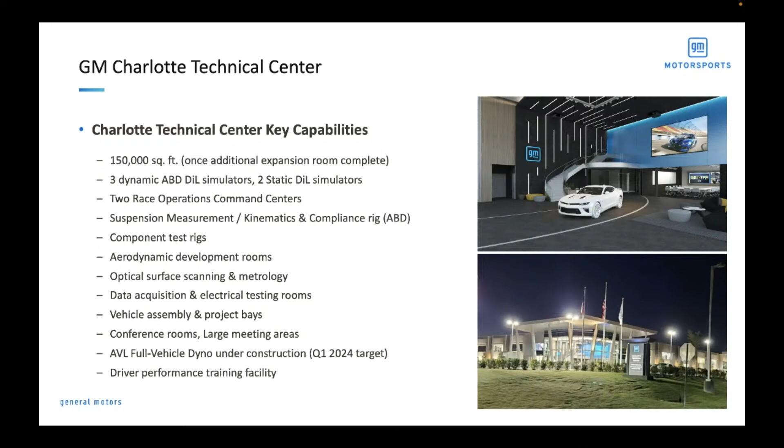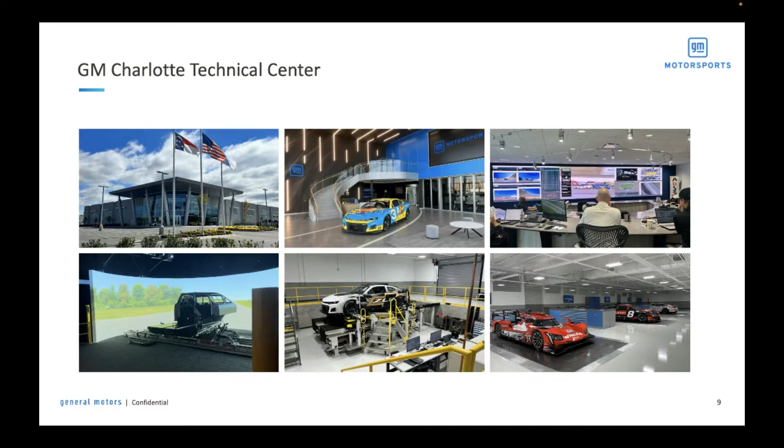So really, when we were sponsoring a third party to run racing, there really was not that connection to GM Production Engineering. So GM Motorsports, the intent is basically to go between the race teams and actually connect the racetrack to GM Production Engineering.

And there's a lot of, as we talk through that, a lot of that is the processes and techniques that it takes to do it quickly in racing. It changes the way you have to think and the way you have to structure all the digital engineering process, because you can't take 2 months to run a simulation in racing. You have to do it weekly, so you have to make different choices and different processes.

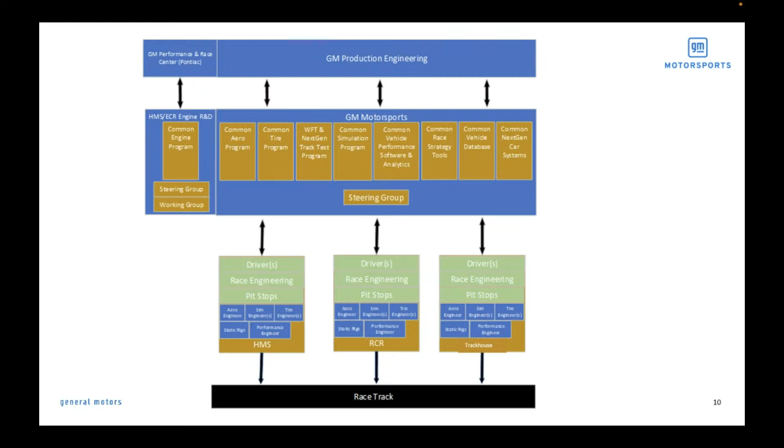So we took all these race teams that used to have their own aerodynamics program, CFD program, simulation. We took all that off of the teams. I myself came from one of the teams and built GM Motorsports to create all these common tools that now all the teams use together. So in NASCAR, when you see all the Chevy teams, we're sharing setups across the teams, the information. There's a lot of collaboration, all of it common tools that we've built.

So if you talk about racing and really what it boils down to, what's successful in winning a race are really these 6 things. And fundamentally, that's all it really is. I've gotten into a lot of arguments over the years to show that this really is all that matters.

And it's the driver, which comes down to the actual talent of the driver, but it's also what information does he have, what does he understand about how cars interact against each other, feedback, training of him, mental training, heat training. Anything related to driver performance is of course a key factor.

Engine is really kind of longitudinal acceleration capability, so it's driving, braking, all those types. The aero, there's only two things that affect the performance of the car. To increase the envelope of performance, it's the engine and the aerodynamics. It actually increases the potential of the car, but then it's actually the tire and the tire force optimization that actually gets that potential out.

So setups, chassis, all those types of things really is how the loads are distributed and how the vehicle dynamics puts load into the tires, which creates the lateral forces, and optimizing that and managing that is really that key fundamental.

Then in race event execution and the pit stop, you can win a race by showing up with a great engine at a track or making a great pit call, but you can't win championships unless you're the best at each one of those. Over the last three years, we've dominated many of the series, and the focus is constantly building up our expertise in these areas.

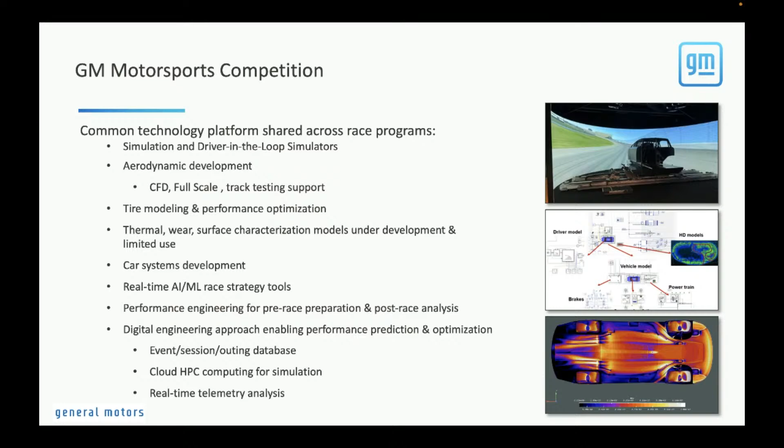Talking about vehicle simulation, our models are all multi-body models based on Modelica, which is an open source multi-body modeling approach. So we have offline simulation that the race engineers run at the racetrack—they can walk right into the driver-in-loop facility, set their laptop down, hit a button, and run on the simulator. The tracks are scanned down to less than 2 millimeter accuracy, so all the bumps, all the cracks, everything is simulated and running on that racetrack digitally.

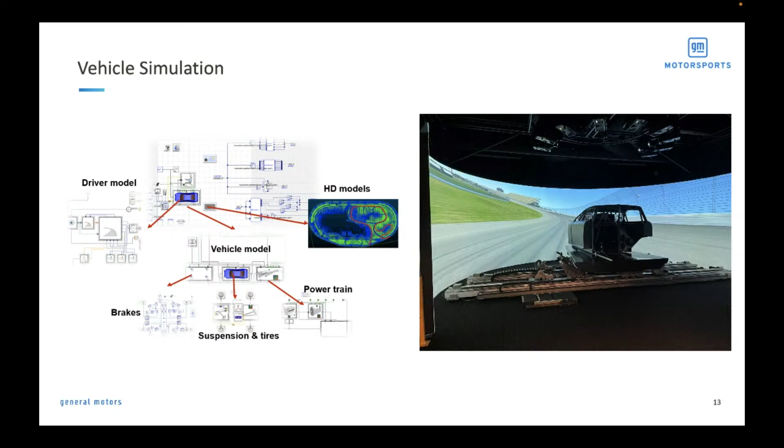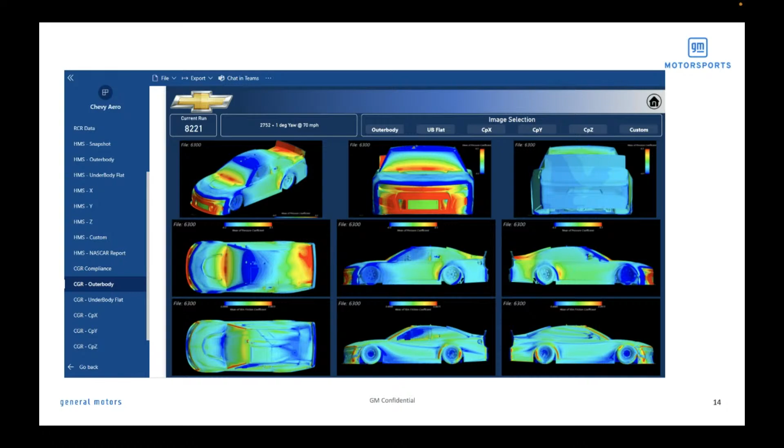Aerodynamics and CFD have been around a long time—I joke that I knew what CFD was before people could spell it. So much of the work is done there, and we create a lot of tools. We run anywhere from 30 to 100 CFD runs a night, about 500 million grid point cases, pretty large cases just for NASCAR. There are thousands of runs done, full 3D, using a lot of different techniques to understand the car from a development standpoint, but also how it behaves in traffic, next to the wall, and a lot of other factors. We're also creating a lot of software so we can look at the images and do comparisons—we're as much a software creation company as we are engineering.

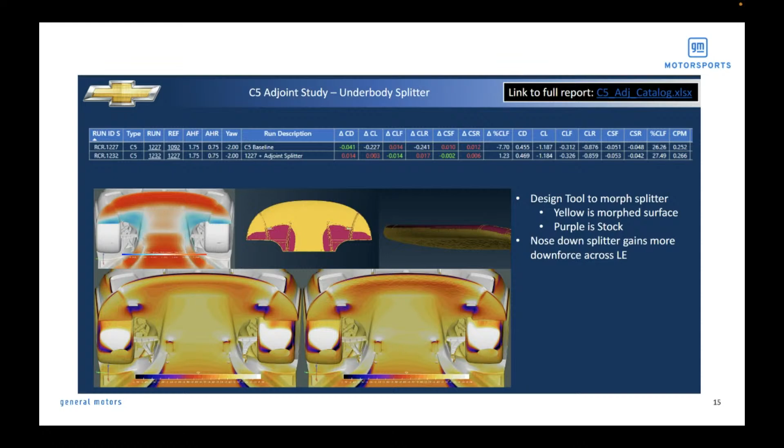Here's one example: as we were developing our 2023 car, we did a lot of adjoint methods. Much of what we do relates to how tech inspections work—they give you a tolerance, so if you get 100,000ths of an inch of tolerance, we're going to play in that and maximize every single piece of it. We do a lot of adjoint methods to look at surface sensitivities globally, and that really drives a lot of our aero development. It's a good example of tying CFD and aero development into the full-scale wind tunnel—the whole front of the car is all rapid prototype parts, with a frame behind that. So as we develop CFD, we can validate straight in the wind tunnel with a full-size car.

The main reason we did this is the actual submission from the sanctioning body required the full-scale car be tested. So we wanted to make sure we understood exactly every single thing, and that process happens very rapidly.

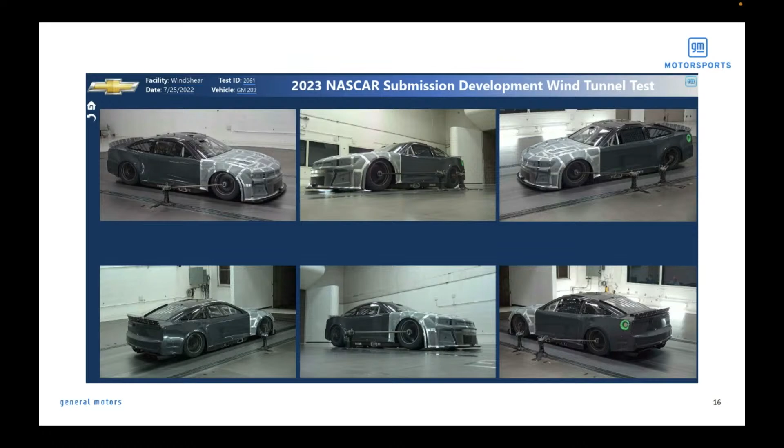The whole front shell of that car can basically be built in less than a day. The GM RP lab has about 1,000 3D printers, so we can turn around things quickly. Getting in front of the production side is another thing, but once we do, they can move really fast.

Some other things on aero that come into play: the aero data has to be put into an aero map or fitting form so the simulation can use it. There are also a lot of plotting packages so the teams can understand where they need to run the race car.

As you get into the other interactions in the system, aerodynamics plays a really key role in the tire modeling, because you're trying to look at the thermal modeling of the tire, the convection to the air, and the brakes. Modeling the brakes fully from the heat transfer, the conjugate heat transfer through the parts, as well as the aero side, is really important to get that heat input to predict the tire temperature correctly. So aerodynamics plays a much bigger role than just external aero or even internal aero on the combustion side — all these systems have an aero component.

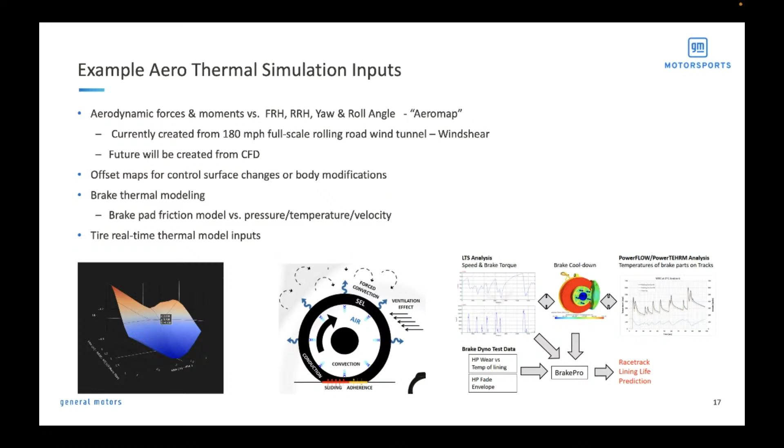This is a complex tire chart for a reason — this is tire modeling 101 in racing and NASCAR. You start out on the left with these tire test rigs. There's one the industry uses up at Virginia Tech called SoVA/GCAPS. The thing about these tire rigs is they run on sandpaper.

If you think about the spectral makeup of sandpaper compared to asphalt, in reality it's not even close. Over the years people would go on these tire rigs, fit that data to what's called a Pacejka magic formula, which is just a curve fit, and they would go run with it.

Over time we realized, from testing on the racetrack with wheel force transducers — each one of these sensors costs about 120,000 and measures all 3 forces and 3 moments on the car — that the OEM tests every time there's a new tire. We're testing on the racetrack to gather real data on the asphalt.

So then we're trying to merge those two: what do we see from the racetrack, driver correlation at the DIL from this test, and then we end up scaling this data to take into account the actual mu and friction characteristics of the track. That's kind of been historically what happens, and you can see all these iteration loops and things. Getting it right is virtually impossible, because a lot of the physics is actually missing from the model, which is the key part.

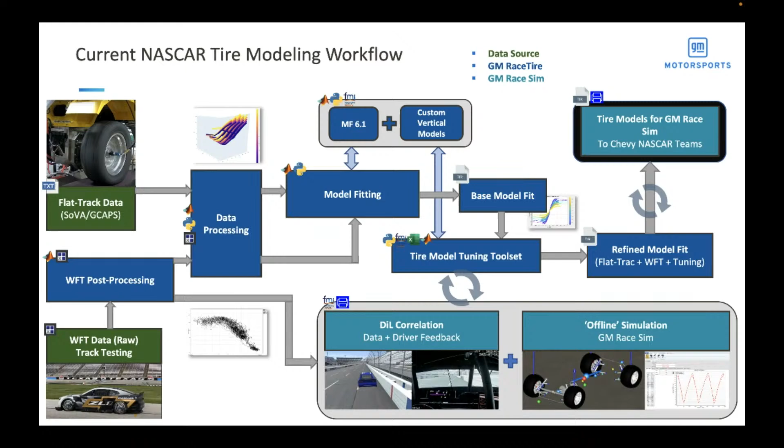You can spend a lot of time fitting data, but if you're missing some of the core elements, you're basically just creating an issue. So how do you get more advanced? You have to start looking at the thermal characterization of the tire, the actual makeup of the tire, how heat flows through the contact patch, and how the contact patch and pressure distribution change on the ground for different loads, cambers, and other things — and then the rubber characteristics themselves.

The tire companies won't let you actually cut up the tire and do typical testing, so the racing industry has developed this really novel way to non-destructively get the rubber characteristics — the loss modulus and storage modulus — to really understand the rubber.

And then you're getting into wear modeling — how the surface of the tire ablates, how wear affects it with different surface references. There's a tremendous amount of effort going on here, and this is true for any racing program worldwide.

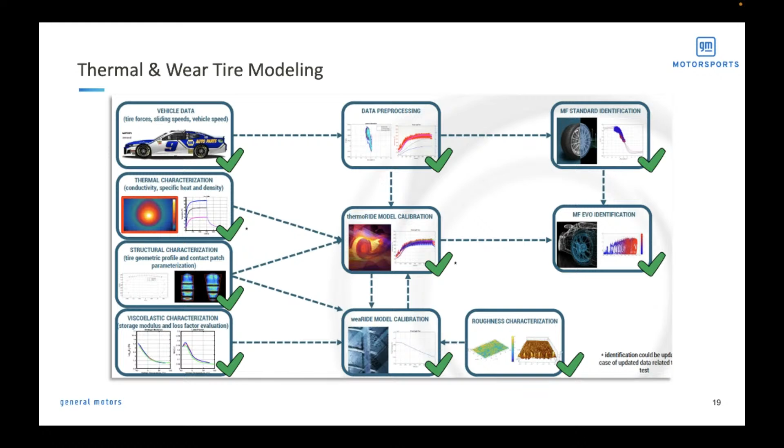If you look at the racetrack, these are two different tracks — one is Richmond, one is Phoenix — where we run the same tire. This is a profilometer measurement of the asphalt, zoomed in. If you look at the two tracks running the same tire, Phoenix has a lot different, not near the macro roughness that Richmond does, and what the tire wants is completely different for each of these two racetracks.

This tire wants really low pressure, while this one actually wants higher pressure. Until you really start to understand that, all of your simulation and all of the digital engineering tools you have are dependent on that tire and road interface — and so you can never really ignore it when trying to make that better.

So if you look at what the challenges are in racing, particularly NASCAR, we're typically dealing with less than 0.5% performance difference from 10th place to first place. So if you're trying to simulate the lap and find that performance across all the different variables, you're looking at really, really small differences, which makes it much more difficult to simulate the whole system.

So you're constantly challenging all of the inputs and learning in an iterative manner. We have to show up with no practice most of the time now - there's very little practice, and at all types of different racetracks. In NASCAR, there's different banking, road courses, ovals - a lot of different variables that are thrown at you.

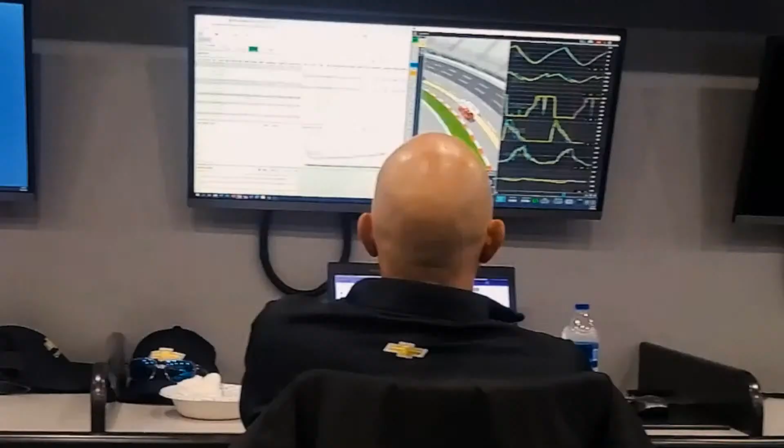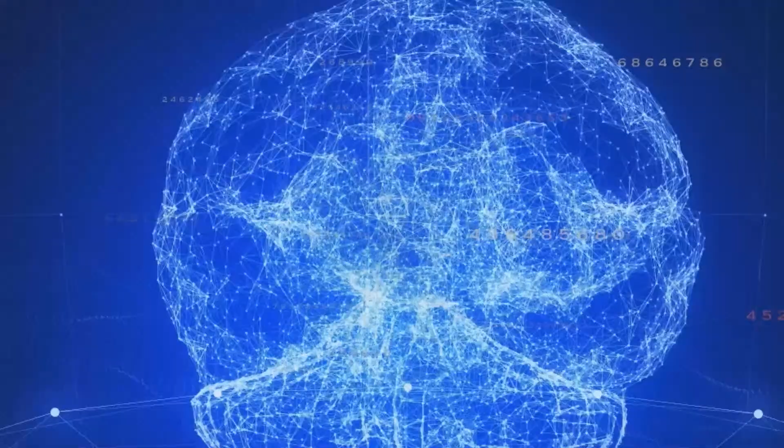In motorsports, data and the velocity with which we can analyze and apply learnings have a direct correlation to helping our race teams reach the podium each weekend. In a NASCAR race, telemetry sensors in-car record and measure speed, throttle, braking, and steering. Advanced GPS monitors the position of cars on the track. From GM's Charlotte Technical Center, our in-race strategy tool, Pit Row, ingests and analyzes over 100,000 points of telemetry data every lap, including lap times, track conditions, pit stops, and more. Harnessing the power of machine learning, our cloud-based application performs more than 1 million calculations per lap and recommends optimum race strategy on every lap for any car in the field.

Many key strategy decisions like track position, chassis adjustments, and when to pit for tires or fuel were historically made instinctively by drivers, crew chiefs, and engineers based on their experience and intuition. Pit Row is given the rules of the game and plays them over and over until it learns all the possibilities and potential outcomes, developing a winning strategy for every situation.

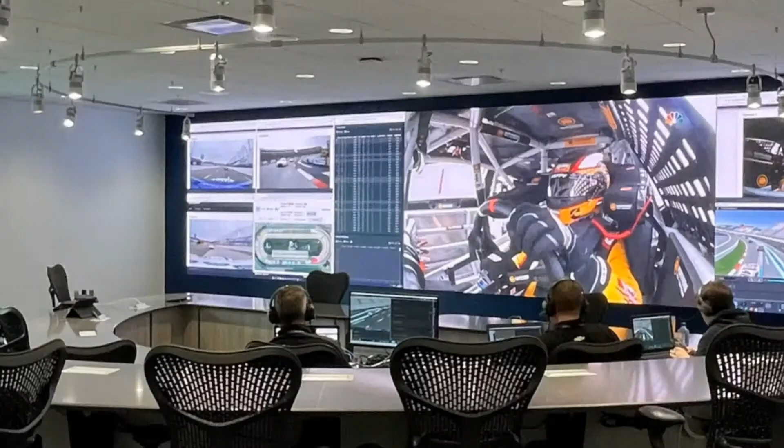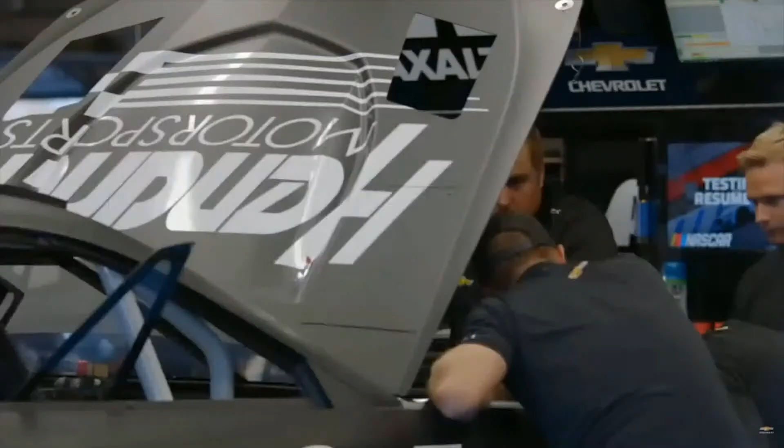During a live race, our machine learning models dynamically update the recommendations. The Pit Row interface displays the best choice of 4 suggestions for every pit stop: stay out on the track, pit for fuel, for 2 tires, or 4 tires. In post-race, we debrief with the team and leverage Pit Row to replay, review, and analyze previous races while creating any combination of race scenarios in its simulation tool to evaluate our performance and tweak our models. In the near future, we will expand Pit Row to all of GM Motorsports as we move to dominate every series.

So really when we talk about digital engineering, it's about combining the design, the simulation, and the actual data - how do I use data to integrate those tools and also make those tools better. So we'll touch on that briefly.

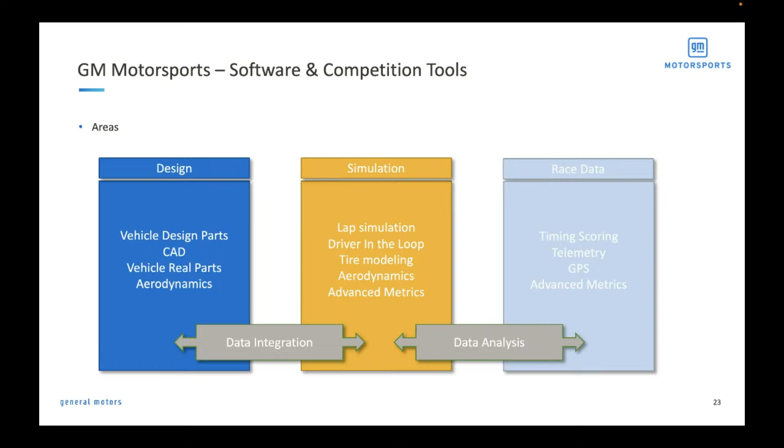If we look at a typical NASCAR race, and this is true of any race series, particularly Formula One, there's a tremendous amount of data coming off the vehicles. But you have data from different sources. You have data from the people on pit road - if you look in the middle of the racetrack, you've got crew chiefs talking back and forth, so there's verbal communication. A lot of the radio traffic between crew chiefs and drivers is public.

So we have live algorithms doing voice-to-text to analyze that data. If a driver makes a comment, it's all analyzed, so we know whether it's our driver that has that issue or whether the whole field has that issue. Then there's telemetry coming off the car, like GPS, so you know every moment what spot on the racetrack that car is. You've got the path it takes, so you can calculate a lot - lateral acceleration, different things to quantify where the friction in the track is.

And all that stuff has to get up to basically somewhere in the cloud where we can do the race strategy, PitRho analysis on it. And then you're pushing it back to the race teams, and they're all trying to collaborate. So there's a lot of data moving, a lot of systems that have to get built to be able to use this live during a race.

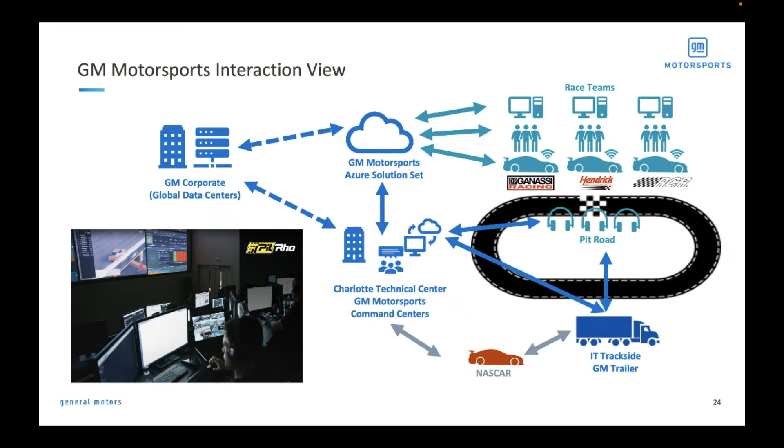This gives you a general idea of all the, from an IT technology standpoint, kind of the whole taxonomy of what we're trying to build.

So if we look at the 3 race teams at the top, there's different analysis and analytics. There's what we call vehicle gateway, which is really the database that identifies what the car is at that moment. So we can go back 3 years and say, I want to run the third lap on the 24 car at this racetrack. All the information necessary to reproduce that in simulation, whether it's ambient conditions, infrared track conditions, the data of the car itself, all the aero data, that's all built into this gateway.

And then the telemetry coming off the car, how you analyze it, how you view it, how you take action on it, and then of course the vehicle simulation, which is really what the word digital twin is, though it gets overused. You're trying to simulate the car, and as you can do that more in real time, a lot of the parameters I didn't know, I now can look at with a 'what must be true' type analysis to actually identify, through machine learning, some of these unknown parameters.

A lot going on, a lot of things have to talk to each other. So when you talk about digital engineering, it's really all of these systems, how they get built together and then used.

Talk quickly about the PitRho Analytics race strategy tools. So we've been doing this about 9 years. It was actually done at RCR. It really started with real-time information coming from the racetrack, and we started looking at how we use machine learning to identify information about the performance of the car. We'll talk a little about the different factors.

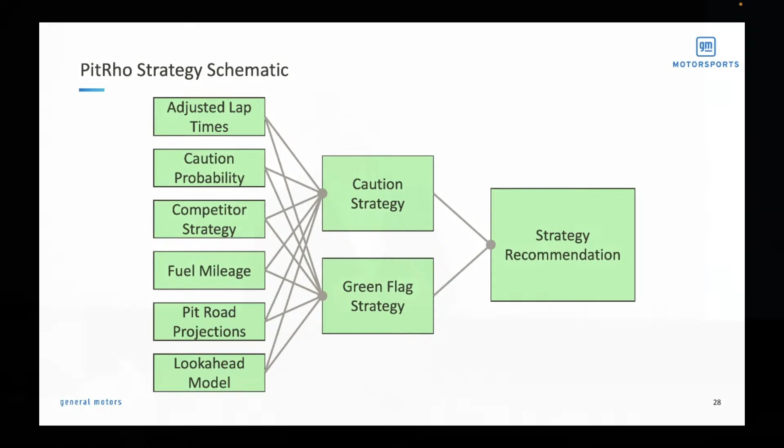So what happens is this tool creates an optimum strategy, not just for your car, for every car in the field, both under green flag running and also if a caution happened. Over time, we also compute not only what the optimum strategy is, but a prediction of what competitors are going to do based on their history. Because in certain situations, drivers are overriding decisions, you kind of know the likelihood of what a particular team is going to do. So all those factors come into saying, okay, this is the optimum strategy.

And telemetry, same thing. Information coming off the car, you know where you're losing time to a competitor. You have to bring all that together, put that in a tool that gets delivered not only to the strategy tool but also the teams. Because if I'm going to pit in a certain sequence and I know I'm going to come out and pass this car at their weakness, if they're weak getting into turn 1 or whatever, that's going to change the decision to the good or to the bad, depending on where they pass the other car. So a lot of passing going on.

So how does this all, how do we analyze where we're at?

The challenge that we always have is the default nature of engineers, particularly to just work on this maturity curve of trying to figure out what happened and why it happened. There are very few that want to step out and be predictive, right? They don't want to predict before the teams go to the racetrack what the lap time is going to be.

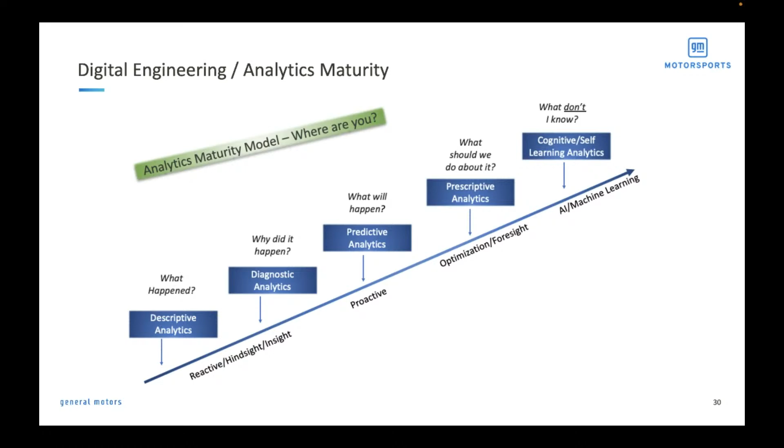And then as you get into the more advanced machine learning things, you actually can learn things on the car that you had no way to even identify that pattern was there. So really our goal is to move up this curve. We have to be predictive. And one thing that's very important, and this is the thing that racing really helps in GM, is...

The race starts on Sunday whether you're there or not. So just like a test, the test is going to start. If you're not there, you miss out. There's no 'hey, I need another week, I need another month.' You have to make a decision. At that point in time, you always say you never get done, you always run out of time. So time is that factor which really changes the main variable of what you're actually trying to do.

Again, not only is it important to be able to tie all these tools together using data and be more predictive, but now I have to learn and do it quickly. So there's a large part of digital engineering that really is how do you extract the lessons learned, how do I have confidence in it, how do I move forward faster.

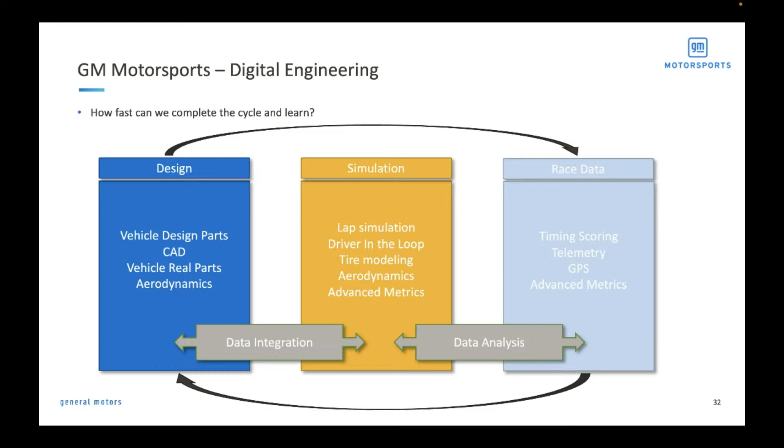So then as we get into, this is just a thing I pulled out of a couple papers, how do you speed things up, right? The technology of building elaborate simulations. CFD's gotten much more complicated. Vehicle dynamics, we're able to simulate more things.

But now when I have to step in a driver-in-loop simulator, I have to do it real time. That model has to run real time. So I can have a complex tire model that does a great job of predicting tire performance, but if it can't run real time, I can't do anything with it. So you end up with a lot of these different types of models where you see this intersection of, say, a high fidelity CFD simulation, or you have just a bunch of measured data - there's a lot of big data, you hear machine learning just churning on the data that gives you something.

And you kind of have these intersections of both. So if you think about what's called surrogate modeling, it's like trying to take the physical simulation and build a machine learning model to reproduce that simulation much faster.

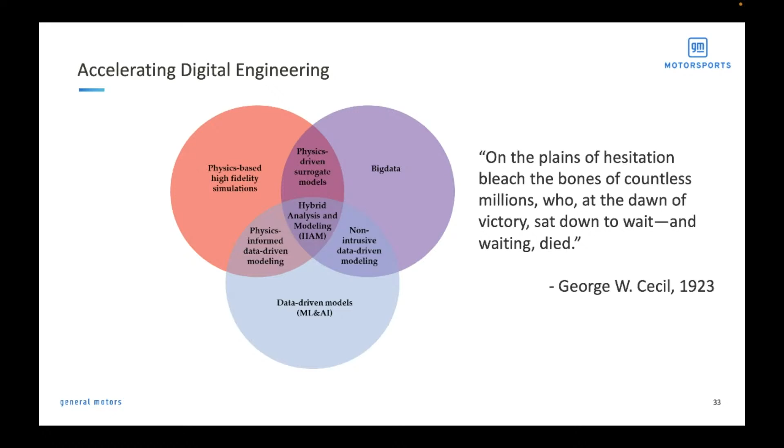This is just a schematic, you can think of it in a simple sense. From the aero data, you're gathering an aero map in a wind tunnel, looking at ride heights and all those things, and just fitting a polynomial to it. So instead of running the car in the wind tunnel every time, you create just a fit to it. A lot of times a surrogate model is just a polynomial or a fit, and then I use that fit in my methods.

You can also do that with much more complex simulations, like an engine model, a vehicle dynamics model, a tire model - getting into other methods, a lot of neural network stuff with tire modeling. What you're really looking for is whether the input and output will match. So you take that simulation, create a digital surrogate, and that's what you're actually using at different times depending upon the speed and the requirements.

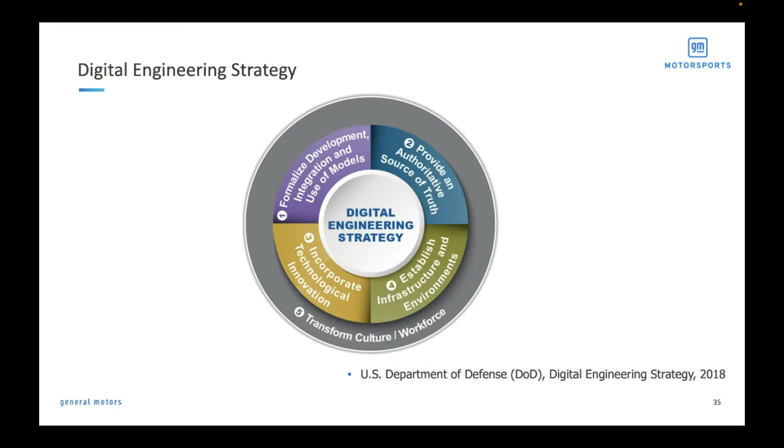Say you're designing a part in CAD, you have to understand how that part's going to be used down the line in a simulation. So all the data that needs to come with it - this model-based systems engineering really has to start from the foundation. In this authoritative source of truth, there's a lot of really understanding who decides what the part is and how you know you have the right part and the right system. And if I want to look at lap 9 of a previous race, how do I know that I have the actual piece?

It's really critical. There's one story I tell a lot that I learned at GM. We were sitting in a meeting on tire modeling, and what used to happen is GM would work with all the tire manufacturers and say, hey, we want to develop this tire for the Corvette, let's say. So Goodyear or Michelin would bring the tire, GM would run it around all these proving grounds, evaluate it, and pick a tire. Then they realized, hey, we're spending a lot of money - we're basically just developing the tire for the manufacturer.

So the push got into, hey, we want you to send us not just the tire, but we want the model with it - we want the tire model to come with it. Instead of us paying to build a model, we want you to give us the model, and if you can't give us the model, we're not interested. So then we get the model, spend 6 weeks running our simulation, and turn around and say, okay, we want this tire. We're still doing their work, right? We're still evaluating their tires.

So now the movement, and some of the idea of digital engineering, is if I can containerize and protect my simulation and just expose the tire model, I can give them access to a cloud running my simulation protected, and say, you work on your model until the metrics come out with handling whatever we require. That way they're doing the work, not us. And to do that, the system of how I have confidence to let my IP go is protecting that, but it's this whole modularization and ability to understand the elements that lets you allow people to compete to make the whole system better.

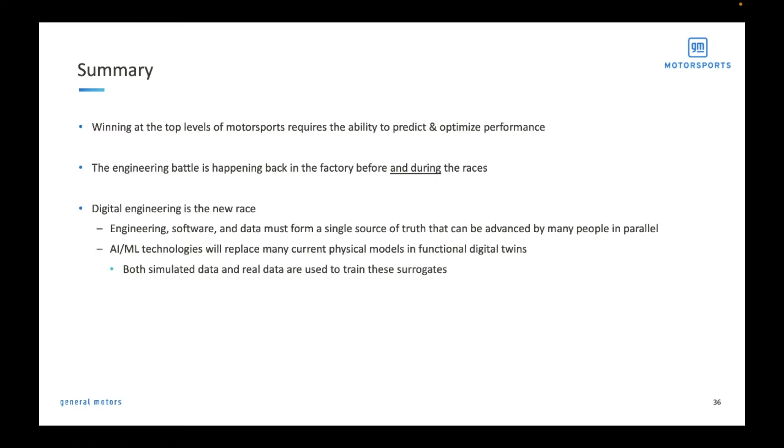Execution, using that during the race, is critical. But how do you bring all these tools together? I was always fascinated going to F1 races 20 years ago—there's 1,600 people who used to work at Ferrari, and they spend about $1 billion a year. They made 5 vehicles, and you're like, how does 1,600 people get all this information down to be able to run the race this weekend? It's fascinating learning how the industry has changed and how all industries are changing trying to accomplish this. So when you watch a race, it's amazing what's actually going on behind the scenes, a lot of technology and digital engineering.